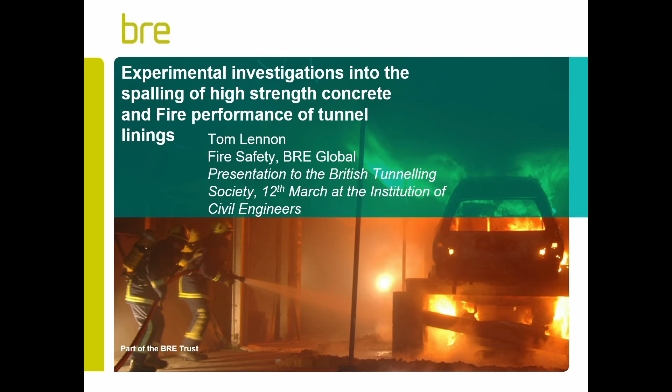So what we're going to talk about: a little bit of history first of all, and the history will help define the reasons why we do things the way we do at the moment. We'll talk about explosive spalling, which is a major issue in terms of performance of tunnel linings, and has been a subject for research in the fire industry for quite some time. We'll look at the procedures for test and assessment, and some of the commercial programs we've done in terms of testing. I've mentioned Crossrail - we were heavily involved in lots of tests for different parts of the Crossrail project, and we're now moving on to HS2 as the large infrastructure project, and in fact we've been testing this week in that area. So if you've got any specific questions related to that, I won't answer them.

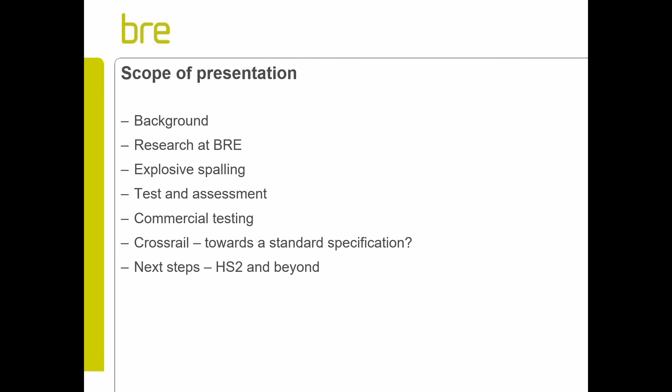So why does it matter? Why do we need to do fire testing? Why is it important? I think if you do a quick Google search of fires in tunnels, you'll find lots of information on major fires in tunnels, including fires that have led to significant loss of life and extensive economic costs. Being such important infrastructure projects, the knock-on effects are considerable. There's been a lot of structural damage, consequential losses and loss of life. So it needs to be considered, thought about, planned for, and where necessary, steps need to be taken to try and mitigate the risk.

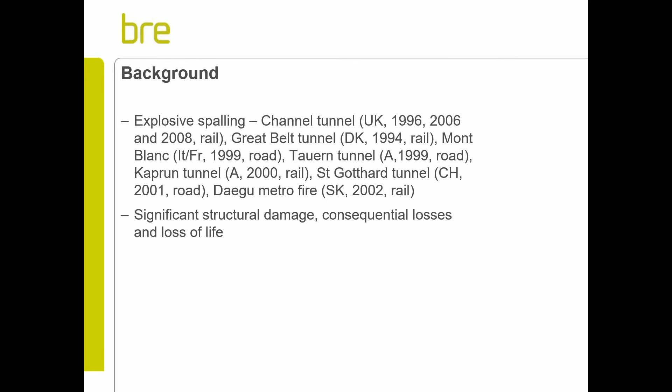I've got some instructions here - this next one says just read the slide, so we'll go on and read the slide because hopefully it's self-explanatory. This is a bit of background, so we're talking about spalling. In terms of structural damage, we're particularly interested in what you call explosive spalling, which is pretty much what it says - losing large sections of the lining in an aggressive manner.

So we look at the parameters that influence spalling, and a consideration of the literature and experience gained over many years suggests that spalling is more likely in the event of high moisture content, which is related to buildings, not just tunnels, high concrete strength, a rapid increase in temperature, or high levels of restraint or applied load, or any combination of these factors. These are the main parameters that govern spalling.

In some cases, in terms of design, you don't need to do anything, because if you use standard design procedures for buildings particularly, there's an implicit consideration that spalling is taken into account in the levels of cover you specify and the minimum dimensions for your elements. But there are times when you do need to take some steps. One route is to consider a risk-based approach and look at the parameters that influence spalling, and if you have one or more of these in your project, perhaps you need to consider doing something. It might be testing, it might be protection. There are lots of options.

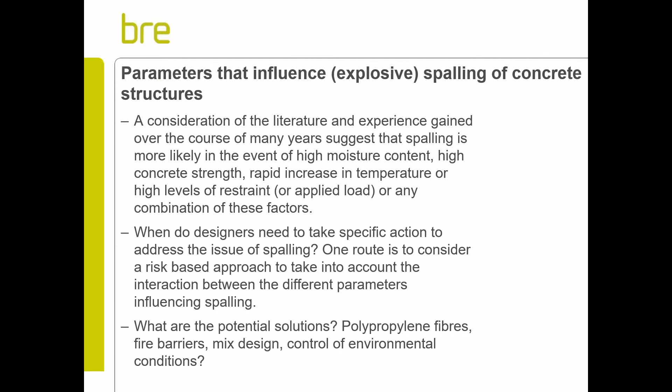So again, a bit of history, not specific to tunnels, but I think it's all relevant in terms of the performance of concrete in fire, and when we come on to look at fires in tunnels, it's all relevant. I was involved early on in looking at high-strength concrete columns for buildings.

It started to be used. I know there were a couple of projects when they were building Canary Wharf where they used high-strength concrete for the lower floors of the building, which meant you could use more slender sections than you otherwise would have been able to. The problem with high-strength concrete, with low porosity, low permeability, high density, is that you have a build-up of stress and nowhere for that stress to be relieved in the case of a fire. So there are particular factors with high-strength concrete that make it susceptible to spalling.

These were understood to a certain extent in the early days. Pore pressure and thermal stress were the most important considerations, and when we looked at this in terms of the use of polypropylene fibres, this was a fairly innovative use of a material that was generally used to prevent shrinkage cracking in slabs. So it was a new application of an existing technology.

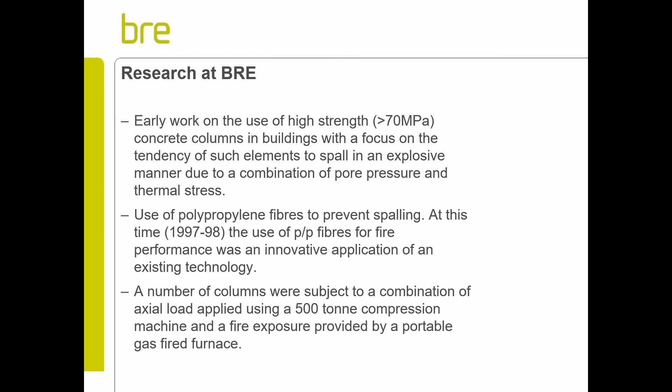So we carried out a research project at the time for the UK government, for whatever the department was called at that point, where we subjected a number of columns to axial load using a 500-ton compression machine and a fire exposure provided by a portable gas-fired furnace. In this case, the fire exposure was a standard fire exposure because we were looking at buildings.

So the first series of tests were on unreinforced columns, 1.5 metres high, 200 by 200, so fairly typical slenderness ratios for columns. We looked at two different strengths, C85 and C105, with microsilica, limestone aggregate, a variation with and without polypropylene fibres, and a difference in the load applied, either 40% or 60% of the ultimate load capacity.

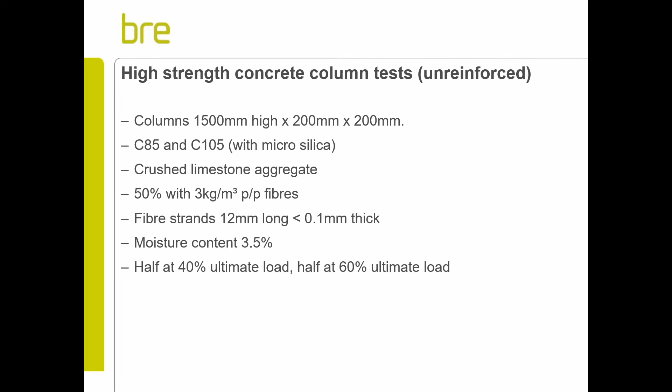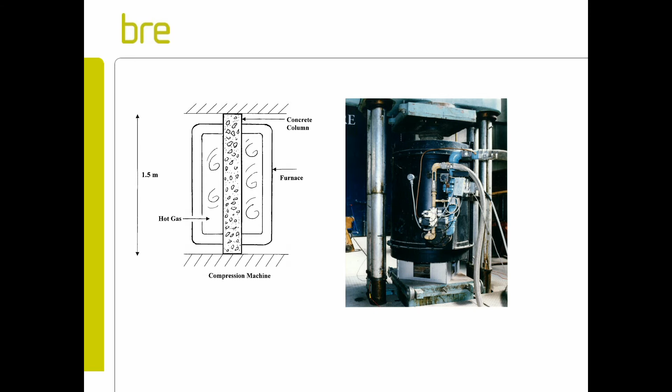So the results from the unreinforced columns - I'd like to show you lots of pictures, but most of them ended up in a dustpan on the lab floor, actually collapsed before the end of the exposure. One of the things that became very apparent from these tests is the impact of load ratio - very, very important. The 60% loaded ones, none of the columns survived the test, regardless of whether you included polypropylene fibres or not. So it's not always the be-all and end-all in terms of a solution to all your problems. Other things need to be taken into consideration.

So only 4 specimens of 30 remained intact at the end of the test. How do you differentiate the first crack and the collapse in this case? If we go back to the...

How do you define collapse in case of fire? In this case, collapse was quite easy to define. It was literally ended up sweeping concrete off the floor. So you would define it as being an inability to support the applied load.

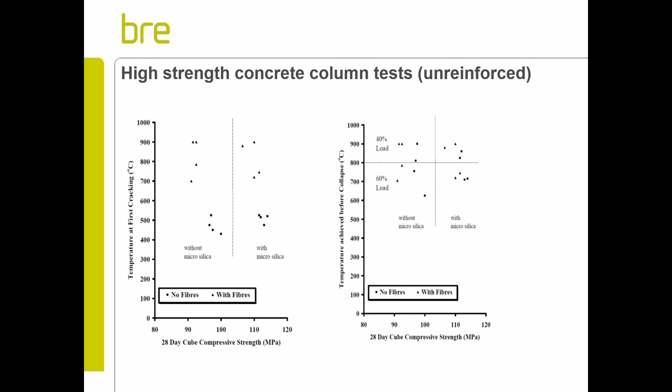Of these tests, remember these were unreinforced, so just plain concrete. Only 4 specimens out of 30 were actually intact columns at the end of the project. Of these, three of the 4 that survived included polypropylene fibres. None of the specimens under 60% load survived the test, regardless of whether there were polypropylene fibres there or not.

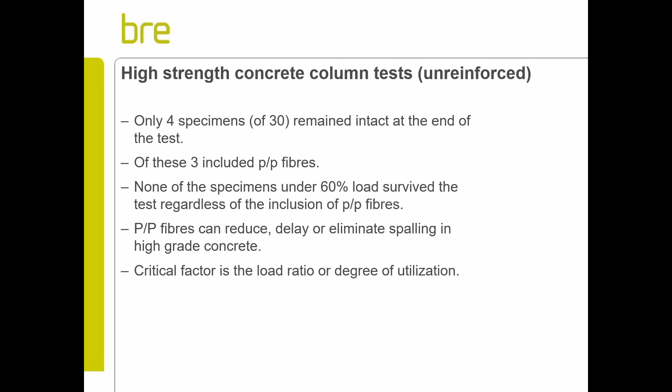So we found that polypropylene fibres can reduce, delay or eliminate spalling in high-grade concrete. This was a critical finding. But the load ratio is also very important.

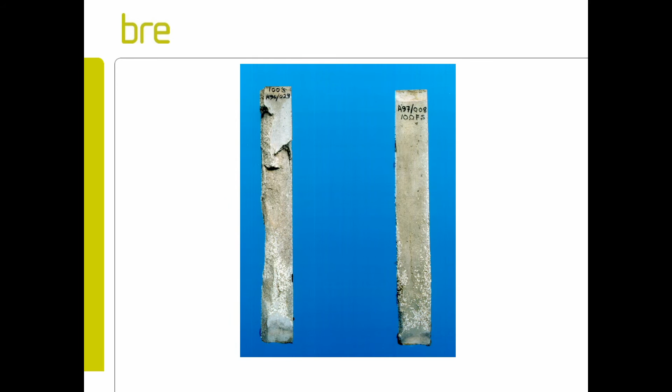So this is the one that didn't have polypropylene fibres that survived. The only one is this one here, which is 100 Newton concrete, and this one here, which has polypropylene fibres and microsilica, and you can see the difference in the behaviour. But as I say, most of these, there was nothing to compare, no photographs, because there was nothing left.

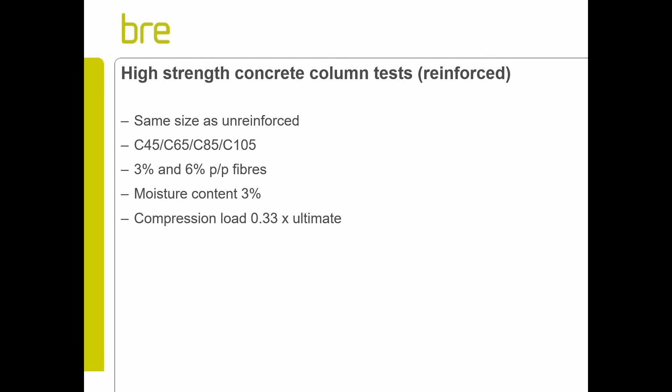So we then went on for a more practical case to look at reinforced columns, same size, same setup. We looked at different strengths, including normal strength concrete as a control, C45, C65, C85 and C105, different polypropylene fibre dosages, fixed moisture content, and a compression load which is more representative of reality, a third of the ultimate load capacity.

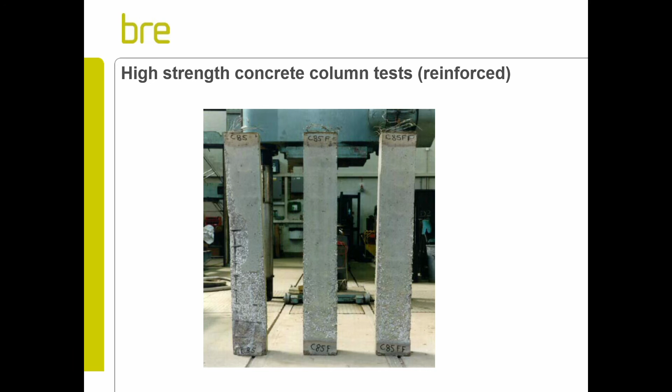And what's important, I think for you people in here who know much more than I do about mix design, is that what you want is not a specific level of fibre. What you want is the lowest level of fibre you can get to give you your performance, because there are knock-on effects in terms of strength and workability if you end up with too much polypropylene in the mix. I'm sure you know more than I do on that score.

So no collapse in any of the situations. Residual strengths were measured, very important, and when we come to look at tunnel linings in terms of the criteria for assessment, residual strength is very important. So residual strengths here between 55% and 75% of the ultimate load capacity, so there's a clear reduction, but some capacity remains. Larger loss in residual strength for those columns not containing fibres, and a loss in residual strength increases with increasing grade of concrete.

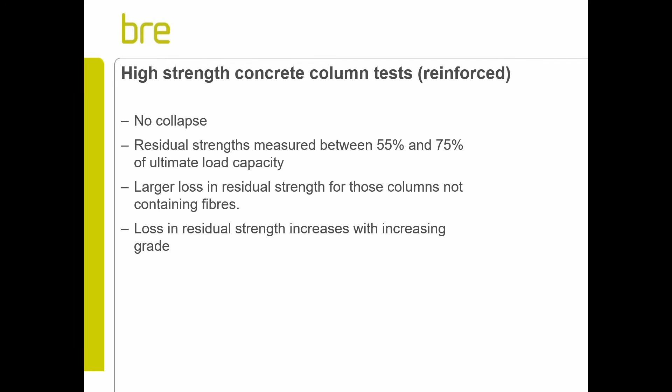We produced a long time ago now, myself and my colleague at the time, Nigel Clayton. Do you remember Nigel? Anybody? Charles, do you remember Nigel Clayton? No? Okay, very, very good guy and very knowledgeable. Not quite sure where he is now, but some guidance document was produced when we were still in the civil service, and it was easy to get hold of.

The work we did was used as input to the European Concrete Building Project. Does anybody in the room know of Cardington, the work that went on there in terms of the large-scale test facility? We were fortunate enough to have an 8-storey steel frame building, a 7-storey concrete building, and a 6-storey timber building that people were allowed to play with, and I was allowed to set fire to, which was quite good.

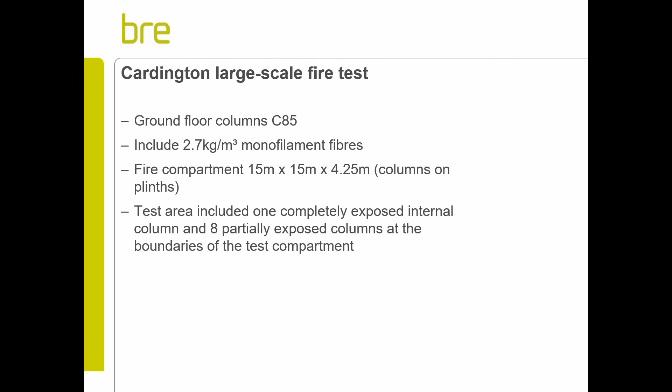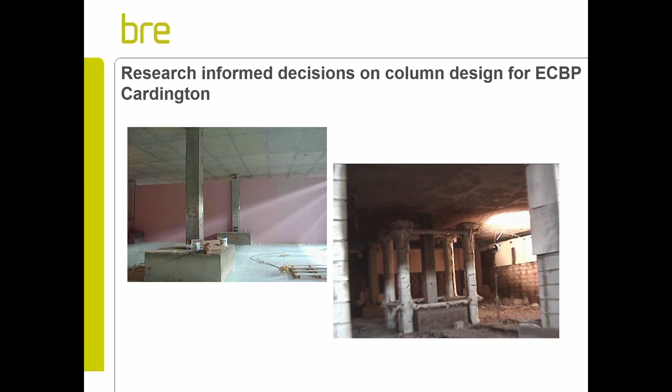In the event, we needn't have worried. We didn't have any spalling of any significance on the high-strength columns. What you might just be able to see is that we did have very extensive spalling of normal strength concrete on the slab here, and that's the exposed rebar you can see there. So with high-strength concrete, with the polypropylene fibres, no spalling. With normal strength concrete and no fibres, we had extensive spalling of the slab. So it's not just high-strength concrete that's the problem.

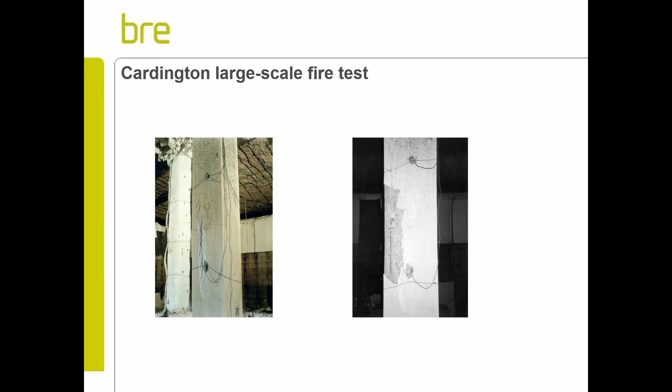Afterwards, some localised cracking, some edge spalling, really in the cooling phase, but nothing significant and no structural damage arising. So that's the first half in terms of the background and the parameters and the things that we learned.

We then used this experience to move on and look at the effect on tunnel linings. So explosive spalling is something that's a specific worry for tunnels, because you have all the parameters within a tunnel which impact on explosive spalling and tend to increase the likelihood of it occurring in a fire.

First of all, you often have a hydrocarbon, maybe petrol tankers within the tunnel. So the fuel load is very high, rapid rates of temperature rise. You have significant restraint against thermal expansion in most tunnel situations, and you often have high-strength concrete, whether you designed it as such or not. So you have this perfect storm in terms of the risk parameters that influence explosive spalling. For that reason, something has to be done.

As I mentioned before, there's plenty of examples where we've had fires and there's been significant damage and loss of life.

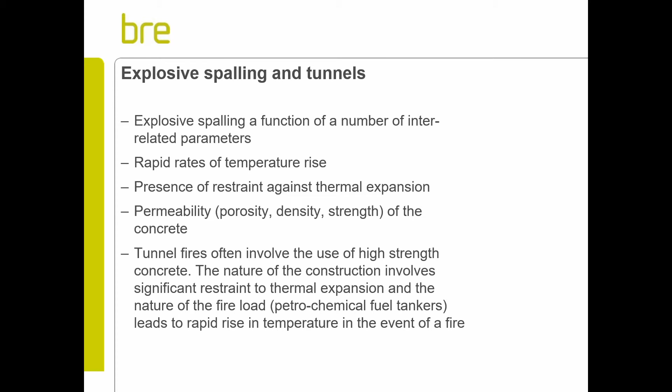Given the nature of tunnel fires and the form of construction used in tunnels, this is kind of a personal opinion, but I think it's very important. It's essential to ensure that the proposed design solution is capable of resisting a hydrocarbon fire while under load. So load is important, and the temperature rise is very important.

There's currently no standardised approach for testing and approval of tunnel lining segments in relation to fire performance, and there's a good reason for that, because tunnels are different, the specific circumstances vary from case to case, so to have too much of a prescriptive approach would be a mistake, but it also means, which is the best approach, which way do you go?

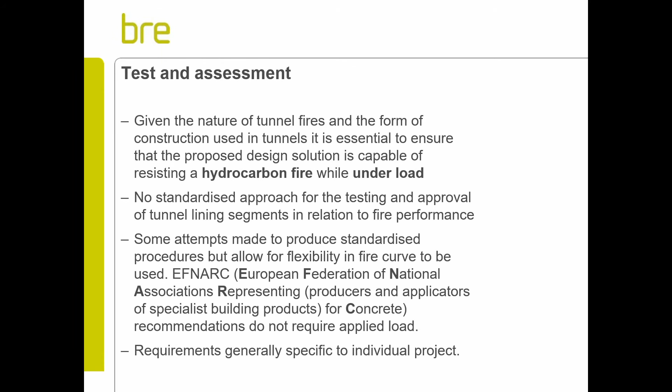So some attempts have been made - this ridiculous acronym EFNARC, European Federation of National... I'm not even going to try it. But they did produce some guidance. I don't know if anybody's familiar with the EFNARC organisation. This was produced some years ago, 2006, a specification and guidelines for testing of passive fire protection for concrete tunnel lining. So it's an attempt to standardise, to codify procedures for testing.

One of the most important aspects of looking at fire performance of tunnels is to model the fire exposure in some way. There are a number of different fire curves, ranging from the normal standard fire curve, to the other extreme, the RWS curve, where you're talking temperatures up to around 1360, which is a bit ridiculous if you ask me.

What we've focused on largely is the Eureka curve, where you're up to 1200 degrees after about 5 minutes, hold that for 60 minutes and then come down in the cooling phase, which is a severe fire exposure but fairly representative of a hydrocarbon fire in reality.

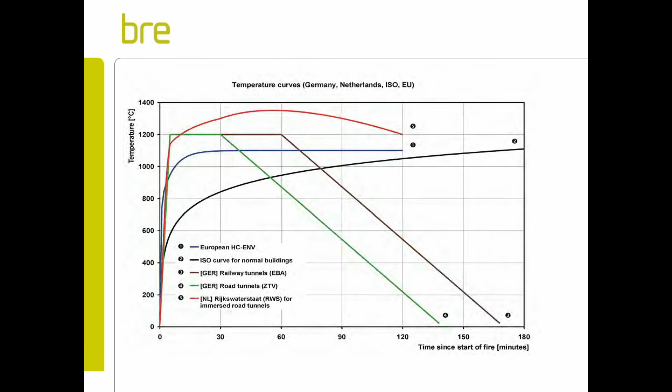So BRE started out - when I say BRE, it is largely me actually. I think I'm the only person who's been involved in this area for several decades now, but nevertheless...

We've provided specialist fire test services for a number of high-profile tunnel projects. Initially, these were just at the specification of the client. So we didn't say we're going to do this, we're going to do that - people came to us, they said, can you do this? Can you follow this curve? Can you load it? Eventually we did some work, initially for Channel Tunnel Rail Link in the early years.

We did some work for Heathrow T5 Tunnel, Terminal 5, Hindhead Road Tunnel. There's been a number of cases where people have maybe an innovative mix design that they want to assess, and they come to us and they look for a specific fire exposure. We can do that - we're flexible.

The expertise derived from these projects provided input to the specification for fire testing of sprayed concrete linings for the Crossrail project. I'm sure many of you have been involved in Crossrail. You may know that in terms of fire performance, there were two different specifications, one for the sprayed concrete linings and one for the precast.

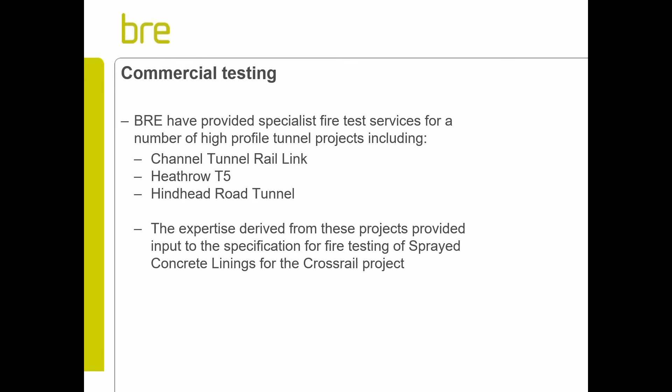I'm not quite sure the fire knows the difference between a sprayed concrete lining and a precast, so I'm not quite sure why you need two different specifications, but we can maybe debate that.

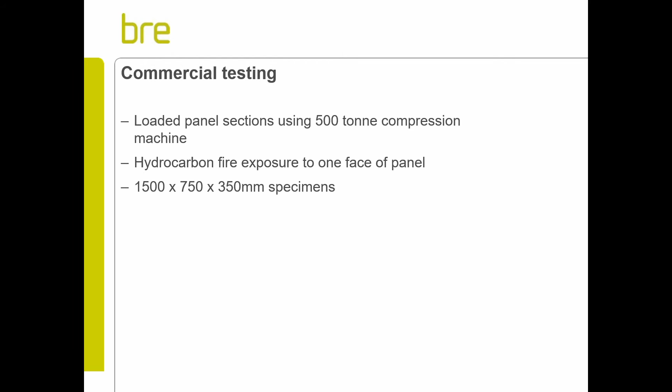So commercial testing - loaded panel sections using the 500-ton compression machine we saw earlier, hydrocarbon fire exposure at one face of the panel, and we generally use 1.5 metre high by 750 wide by 350 odd specimens. This is to fit in between the screw jacks of the machine, so it's practical reasons for the geometry, but it's large enough, I think, to simulate effectively the stress conditions you'd have in reality.

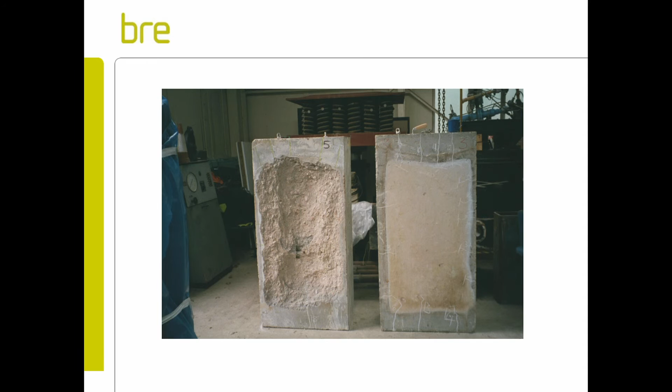Again, you can see the depth of spalling here in terms of exposing the main reinforcement, so obviously having a major impact on the structural performance. And you can see there the various levels of spalling - from the deep one here, some extensive surface spalling, to here really fairly superficial spalling of the surface.

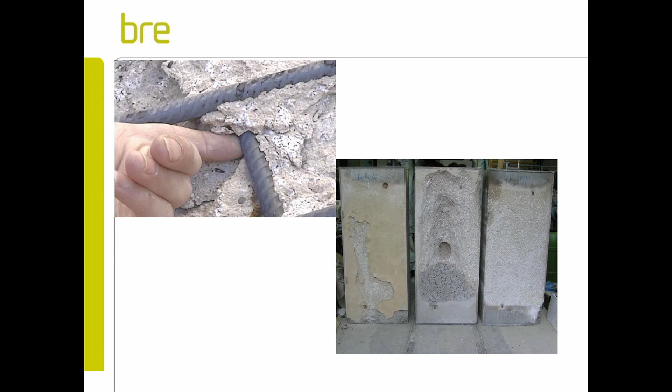So, Crossrail - two different specifications I've mentioned for sprayed concrete linings and precast tunnels. Both the sprayed concrete linings and the precast segments require the use of the Eureka curve.

The sprayed concrete linings in this case had an applied load of 5 megapascals. That's certainly changed on the HS2 specification now, but we can accommodate other values. For the sprayed concrete linings, there's a possibility of doing small scale to look at maybe the preliminary mix design, to see if it's likely to spall before you go on to do the larger test samples. I don't think it's mandatory, but it's better to find out if you've got any problems at the early stages rather than commissioning the large-scale panels.

The performance criteria, very important here, is based on the depth of spalling. So there's normally a requirement to limit the depth of spalling. I've seen some of the earlier specifications which called for no spalling, and I'm not quite sure why that's required. I think what matters is not whether it spalls or not, but whether you have an impact on the structural performance. So I think this is more sensible than saying it shouldn't spall.

We look at the temperature rise within the slab. I'll show you what we do there in a minute, but in terms of the temperature distribution through the slab, what's often important for the sprayed concrete linings is the impact on the waterproof material, which may have a certain melting point, so you've got to limit that to a certain value. And importantly, the residual strength of heated concrete. So once we've actually done the test, we take some cores, which I'll show you some pictures of. We do a core log and a strength profile through the depth.

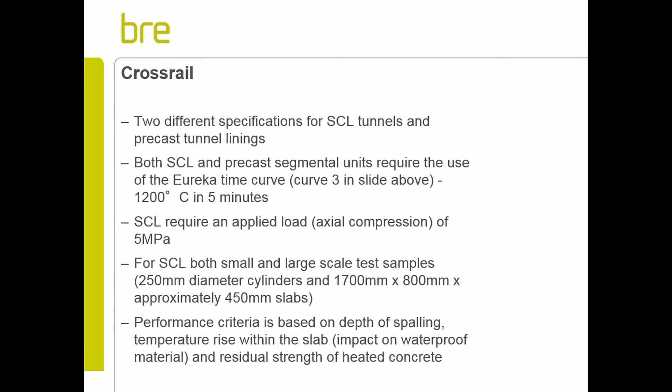So that's a Eureka curve.

Question regarding the waterproof material: if you're assuming a precast lining and you're expecting a spalling failure, and there's the gasket that's over there - will that melt first and the water vaporize there, or will the one in the concrete vaporize and cause spalling first? I think it depends on the design, to be honest. We are measuring temperatures through the depth, and we're measuring the extent of spalling. The actual impact depends on the thickness of the lining, the thickness of the precast unit, and the level at which the waterproof membrane is. So it's specific to the design, but as long as we know what the temperature distribution is, then we can make decisions. It also depends on the constituent materials, which vary in terms of their melting temperature.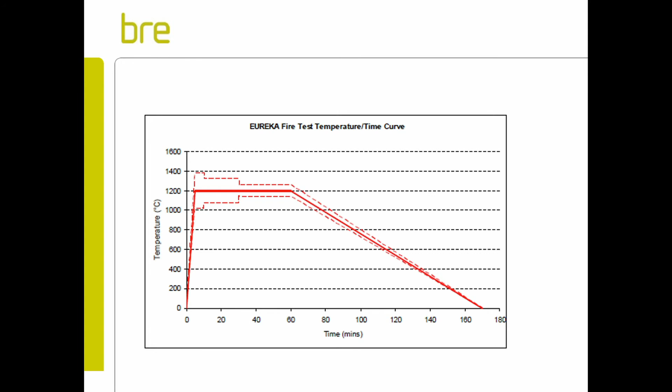Although here it looks like there's no tolerance on the cooling phase, in reality you basically have to get from here to here in as short a period as you can and get as close as possible to this curve. What we find with the dynamics of the furnace is that from here to about 110 minutes, we can follow this curve almost exactly. When you get down to 300-odd degrees, you can't actually achieve that. We turn the furnace off, switch it off, and eventually end up somewhere down here. But in terms of the behaviour of the panel and the performance criteria, it's irrelevant.

So this was from the Crossrail specification, showing small cylinders as a sort of preliminary test. I actually don't favour this anymore - I think it's better to do a panel test, but a smaller panel. And these are the larger panels showing the heated area and the overall geometry of the section.

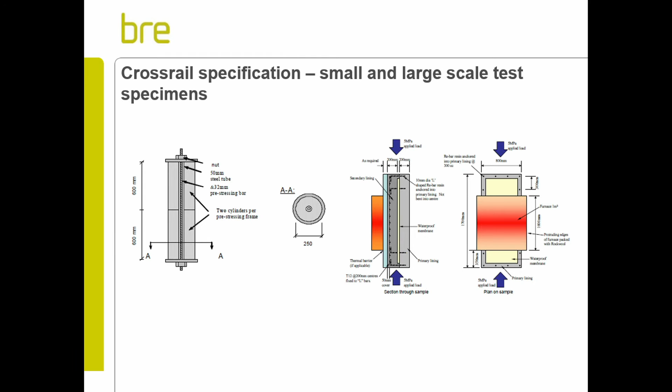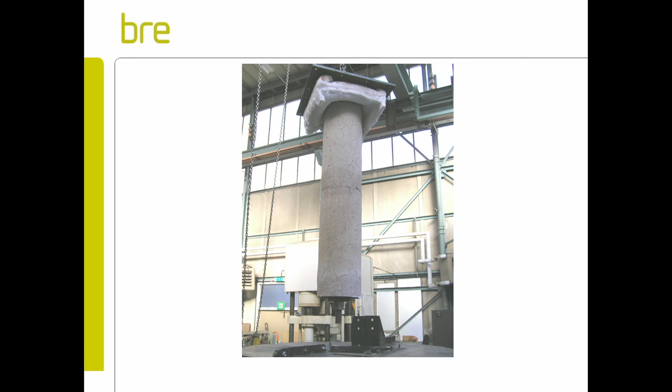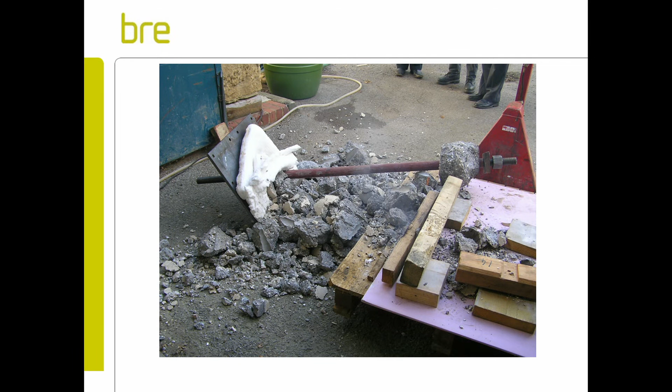This shows the small-scale test, which I haven't done for a long time - a cylinder here which isn't really under load, but is restrained. We've got basically a bar that runs through there and a plate that we tighten up. We also take it straight out of the furnace and stick some water on it, looking at the effect of cooling, which can cause significant thermal shock, and that's the end result.

And that's on a panel that didn't spall at all.

So the thermocouples - a lot of work goes into designing these systems, and a lot of the time it's based on finite element modelling, CFD modelling to look at temperature distributions, and the models can be validated with a good idea of what the temperature distribution is through the concrete. The models will only work if there's no spalling. If you get spalling, it's very difficult, almost impossible to model.

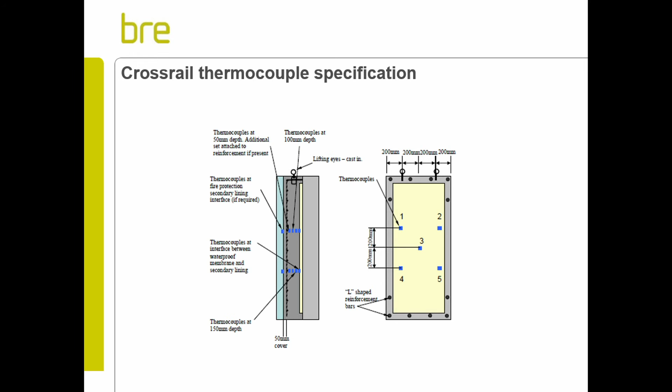So what we have is various distribution through the panel, and then at specific distances from the surface we have thermocouples through the depth at each location, which gives you a good idea of the temperature distribution throughout the panel.

So we have to place these thermocouples. This is from one of the Crossrail projects, where we have to visit the sites, and before they're cast we have to install the thermocouples. We have to make sure they're in the right positions, and that they're not affected once the panels are either sprayed or poured.

It's also very important to protect them so that when they arrive at our laboratory they're working, in good order. We install the thermocouples ourselves on site, so the blame for that if it doesn't work is down to us.

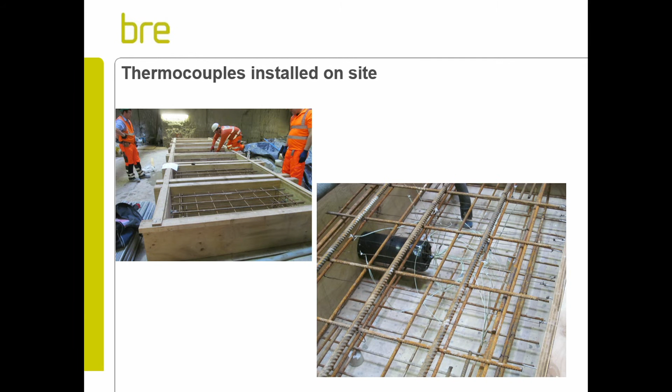You see the surface of these are sprayed concrete. Obviously the precast panels tend to be a little bit smoother. The specifications in general - we're testing panels which have been subject to exactly the same curing conditions.

What we have here is a regime where, for 2 weeks before the test date, we control 40 degrees C, 60% relative humidity, and the cube's the same, so that everything we test is basically at the same moisture content, same conditions.

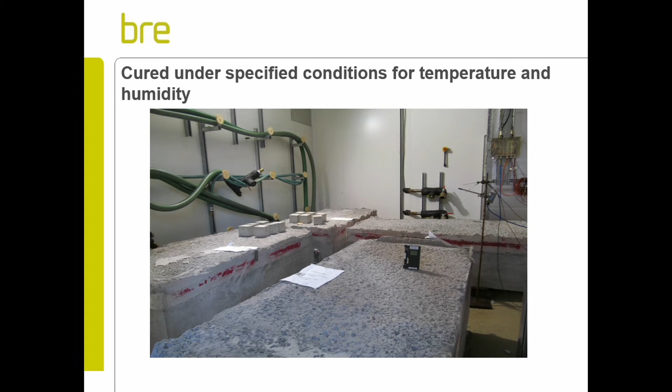Again, this requires quite a lot of input as well to provide these facilities.

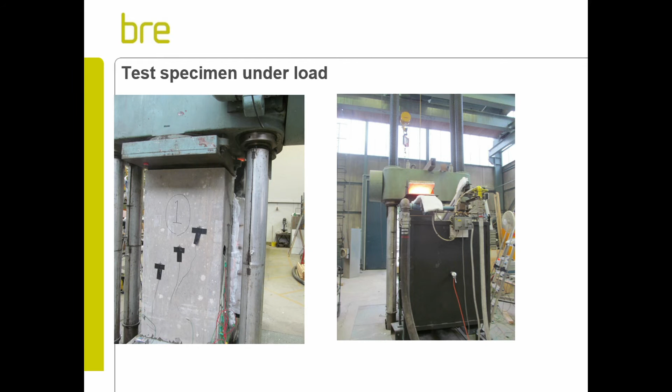This shows the specimen under load. So you can see here we've got 3 thermocouples on the outside - I think this is a Crossrail one. The specimen is in the machine, and this is a gas-fired furnace, controlled through Type S, which is a platinum thermocouple, quite a high standard thermocouple, to give the control on the furnace.

Once it's been tested - this is from the back actually, so the unexposed face - we take cores from various locations, and the cores are then cut and split into 50 mil cylinders, and the residual strength is assessed through compression testing. So we end up with a log of the strength with depth from the exposed face.

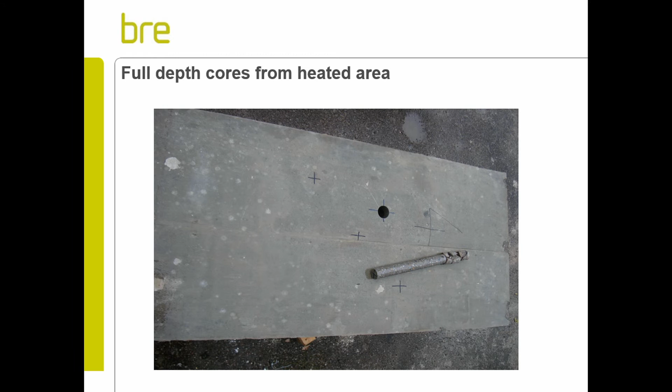Okay, so precast linings. I mentioned that for the Crossrail specification there were two different test methods - so same fire curve, different specimen size and shape, different loading arrangement. I think the specification, personally, is dependent on the experience of the consultants employed to develop it.

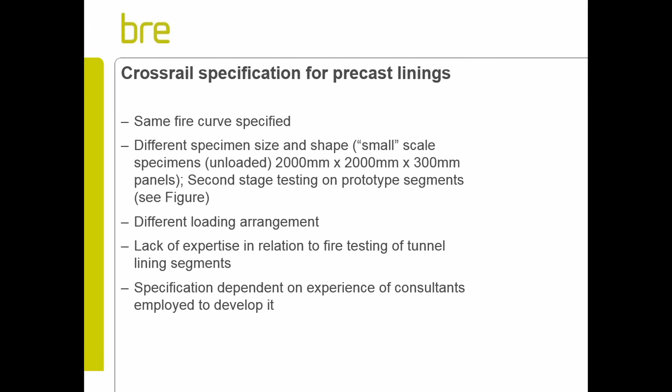So the specifications are generally written by a consultant. If they've had experience of working with BRE, then the specification reflects the work done by BRE. If they've had experience of working with maybe TNO in Holland, it will reflect their conditions. I think there's not a lot of logic behind it, to be honest.

So this is a schematic of the furnace situation in terms of the segment testing, which is much more complex, much more expensive, and much more difficult to carry out than the work that we do.

And maybe it's necessary, who knows, it's not my call. I sometimes wonder if this is actually all necessary to achieve what you want to achieve. But there we go, we can't do this.

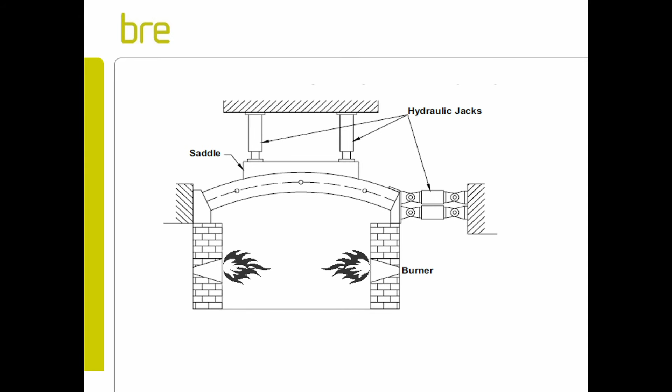There is an alternative, which is the mountain to Mohammed principle, bringing the furnace to the tunnel. There are more than one company on the continent now who offer this service, where you can bring the furnace up and do an in situ test, which is quite interesting.

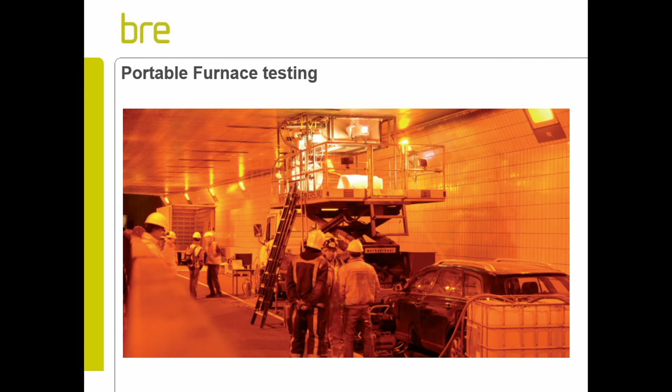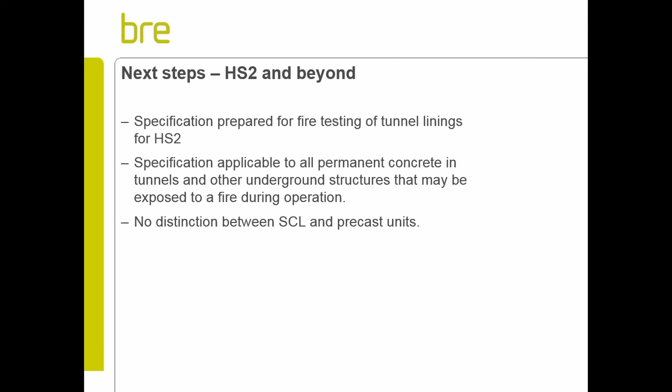So, next steps, which is where we are now. The specification's been prepared for the fire testing of the tunnel linings for HS2. What's notable from our point of view is the specification is applicable to all permanent concrete in tunnels and other underground structures, including sprayed concrete and precast. So I think in terms of the UK position, it's a good move, but there we go, I guess.

I think there is a need for standardisation in some... Just like to say, on Crossrail, when we were designing the portals, 2009 and 2010, the design manuals were still being developed, and fire was quite late coming in, and they did try to say everything had to be the same, but we ended up with things which were quite unbuildable. In terms of the portal.

Yeah, we then had to step back and really take a risk-based approach, where when you did have a portal, the vertical elements wouldn't really develop those kinds of temperatures, very much like your building test, where the columns are okay and the slabs were not.

So, I'm not sure that moving forward for HS2 whether that's a good idea to say everything should be the same. Yeah, I mean, there are the people who make the decisions on these, I think they need to consider a whole load of factors. And there's a lot of maybe modelling work that can go into making decisions on the specification.

But I think things like the choice of fire exposure - it's quite easy for somebody to say, right, we've got to test everything to the RWS curve. Now, I know from the work I've been involved with for many years that there won't be a difference in performance between the Eureka and the RWS curve in terms of spalling. So if that's the reason, you need to think a little more closely about it.

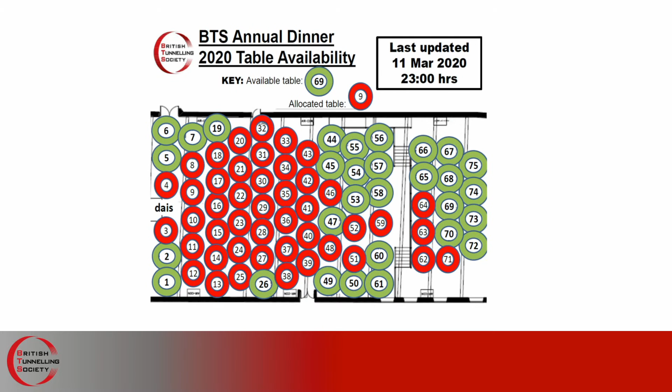It was a hard job, this. It was a hard lunch. Yeah, what we do for you. And this is the table plan, available on the website. Green is still available, but we are up on bookings already, and it's selling out quickly.

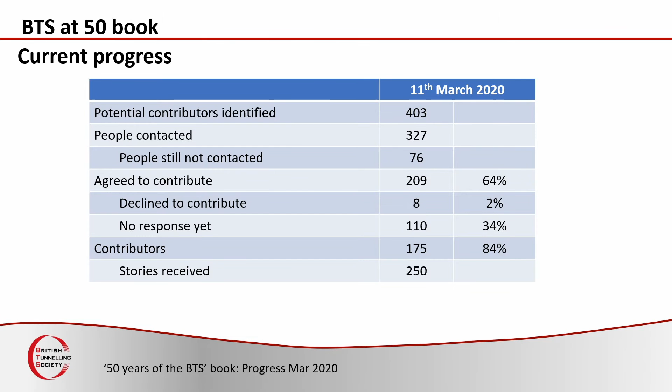Probably 300. So Ken's original target was 200. He then realised we were going to beat that, so he lifted it to 250, and we've beaten that too. So staggering. I've read a lot of those stories. Everyone is a winner. It's fantastic.

We've got a good problem. Just going through the numbers as a reminder, we had a pamphlet in December of stories. In January we had a booklet. In February we had half a book, and now we've got 3 books. But that is a good problem to have.

We've got 220 pages in this book, so we're looking at 88 to 110,000 words. But we've actually got, at the moment, 250 stories, 1,100 words each, so we've got 275,000 words and more to come. Have you counted all these words, Ken?

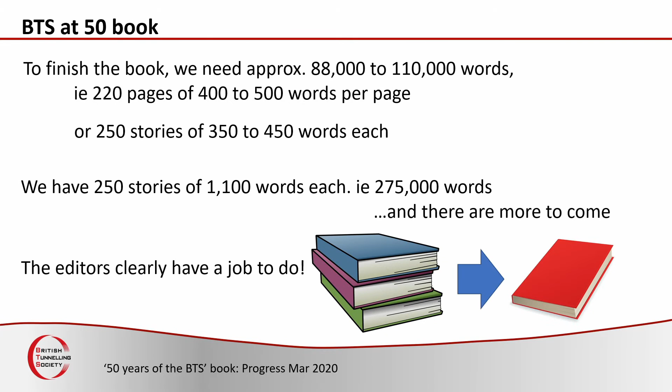Everyone's a winner, so the editors clearly have a job to do. We've got to get those 3 books down to 1. There's a huge thanks to all who have contributed, but please accept that your contribution has to be trimmed down. We don't want you to rewrite the contributions.

The publisher has told us that the difficult thing is getting all that raw material in, and we've got that all in. The editorial team now is going to work, look at the book overall, and draw out the bits that are good and take some of the duplication out. So split the chaff from the wheat, or whatever it is.

When we've edited the stories down, we will be contacting all writers to ensure that the way we've edited the story meets with your acceptance. That's going to take quite a few months to do. But still, anyone who wants to write a story, get it in.

Ken's particularly keen on short ones that can be squeezed in. So we have stories from miners, well, you can look at... now, there's a prize here for... let me say, we are getting some stories from electricians, so we are going to fill that slot.